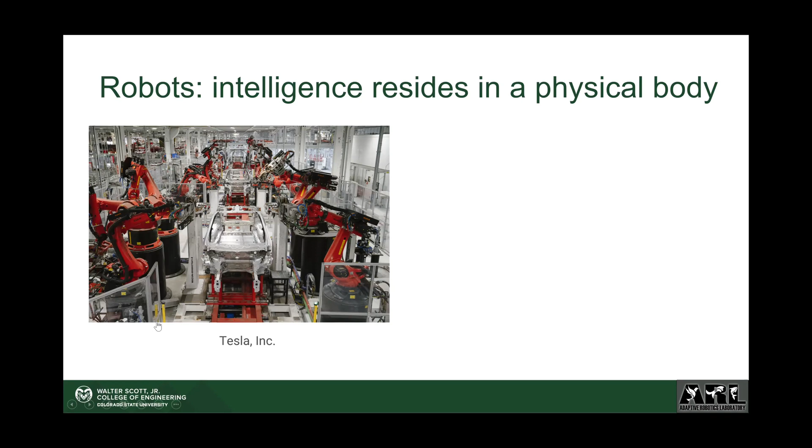That's a traditional robotic system. Recently, people are trying to develop robotic systems that can move from these structured factories to unstructured, dynamic, and varied environments. On the right, I have a figure from a company called Boston Dynamics — they develop four-legged robots and humanoid robots. All of those still need a body. The body should function very well if you want real intelligence. If you don't have the body, you cannot interact with the environment.

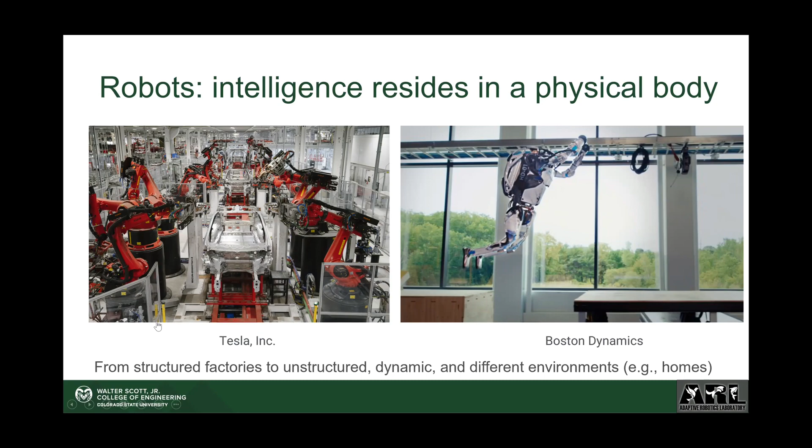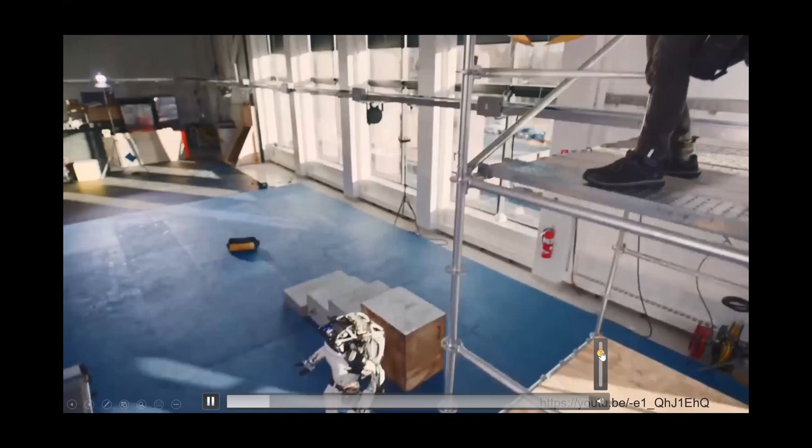I have a very short video from Boston Dynamics. Let me check the sound. Has anyone watched this before? It came out a few months ago. Anyway, it's a humanoid robot.

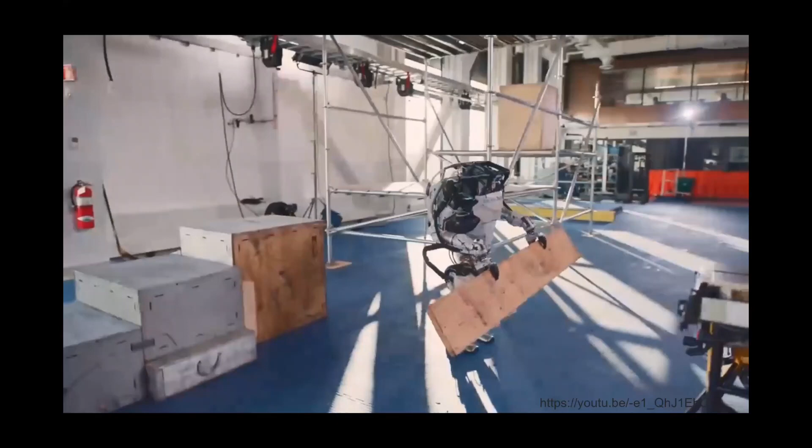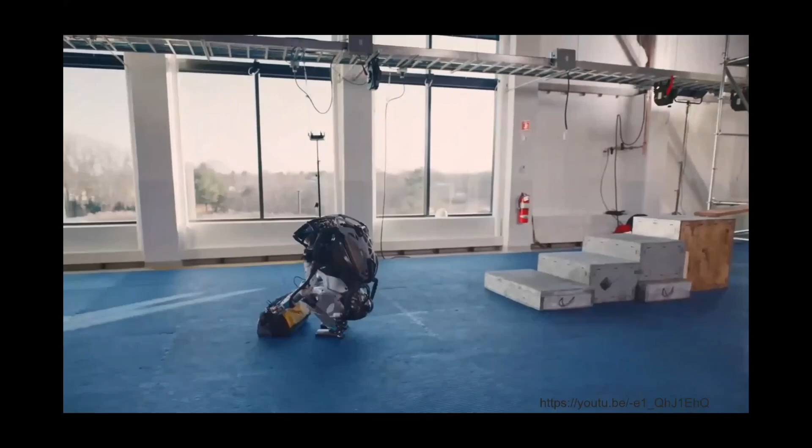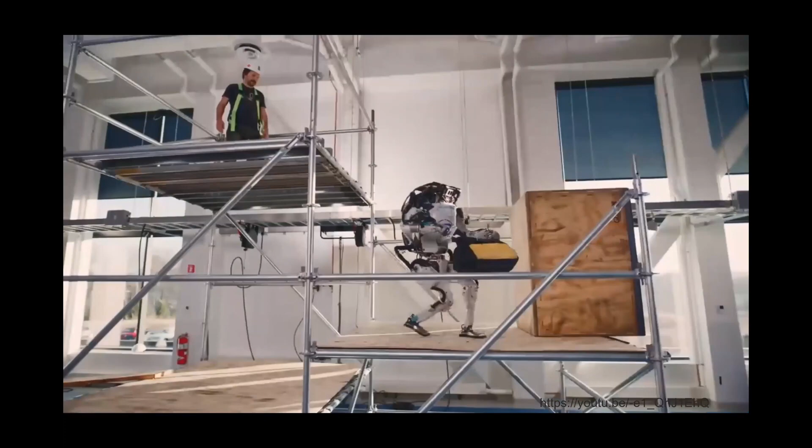It can pick this thing up and put it on. Then, because the person on top forgot his tool, the robot receives a command. The robot figures out how to get up, picks up the wood, picks up the toolbox and the tool, goes upstairs, throws it to the person, jumps off, and does a backflip.

This is a quite impressive result, because if you imagine all those joints — you have lots of joints, lots of arms — and you need to interact with the environment, you need to pick something up. So it's very difficult, but everything should be in the robot body.

So that leads to the major topic today: physical artificial intelligence. What is physical artificial intelligence as opposed to computational artificial intelligence?

Here I have a definition from one of the leading experts in this field, Metin Sitti from Max Planck. Basically, physical artificial intelligence is about how we can embed intelligence into the body of a robot or agent. So we have sensing, actuation, control, everything. How can we do that inside a body so that we can potentially reduce the computational requirement, or do something based on the body that can function by itself.

So here I have a few examples from biology. This animation shows a fly trap. Basically, this fly trap, as long as it senses something getting into it, can automatically close. Of course, this fly trap does not have a brain, right? It only has this body, no brain, to function. So how can it trap it? This is based on physical intelligence.

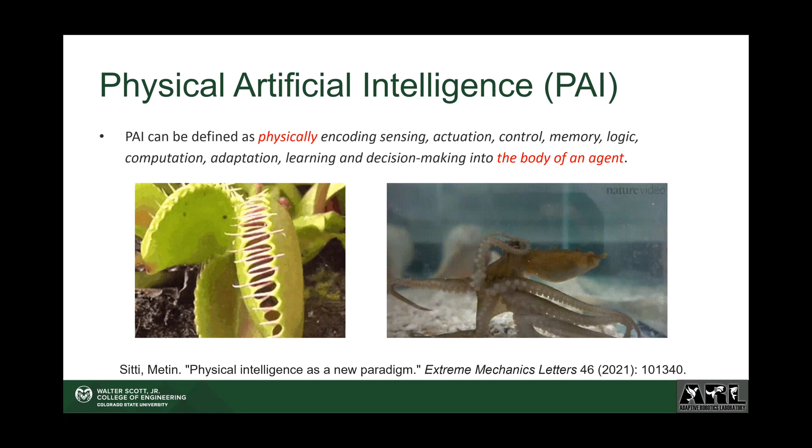So in my lab, we're trying to leverage this area of physical artificial intelligence to develop adaptive robotic systems. We are mainly focused on designing robotic systems that can better interact with and adapt to different environments.

We are specifically interested in robots that can change their morphologies. For example, here I have one example: think about applications like search and rescue, environmental monitoring, or surveillance. If there's an earthquake, normally there's no robot that can go into the area because there's too much rubble, or the environment is too difficult to navigate. So imagine if you have a robot that can move around, and if there's a small gap, it can squeeze or change its body size to make it smaller so it can go through the small gap.

And if there's a crack I want to go through, imagine the robot can fold its legs so it can crawl below this crack. And if I have a pipe, I can also locomote by changing the body morphology or the motion of the legs, so it can go through this pipe and also climb over holes. Eventually, you can use the legs as an arm, maybe to deliver medicine to a human trapped in the area. So those are things we try to accomplish.

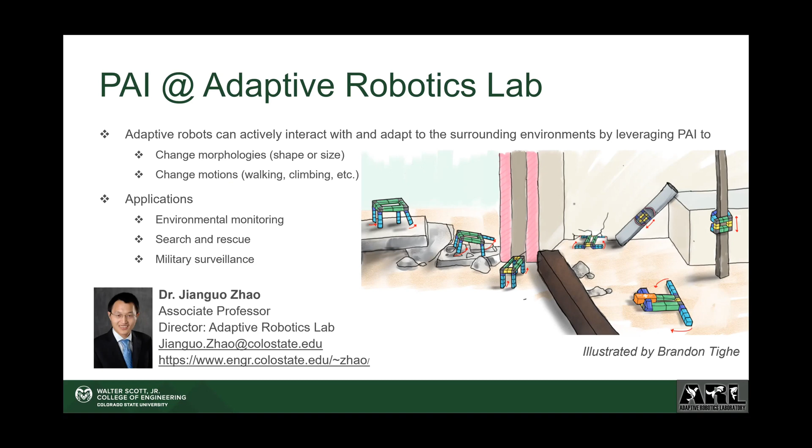So today, what I'm going to do is talk about 3 projects individually, trying to demonstrate how this physical artificial intelligence can complement computational artificial intelligence, and how we can potentially combine them together to enable the next generation of robotic systems.

The last project I'm going to talk about is how you can reconfigure the mechanical structure on the fly after you build a robot. Normally, if you want another function, you need to disassemble the robot and reassemble it to get another function. So if you have the same mechanical or physical structure, how can you reconfigure it on the fly so it can achieve different functions? That's the last project.

So the first project: perching for flying robots. I think this is a very good example of the trade-off between computational and physical artificial intelligence, and it's also a very interesting problem with a lot of practical applications.

Imagine all the flying robots nowadays, like quadcopters with 4 propellers—they can only stay in the air for less than half an hour, so it's very energy inefficient. But if they can perch onto some objects, like birds do, then they can save energy while still doing some function like monitoring.

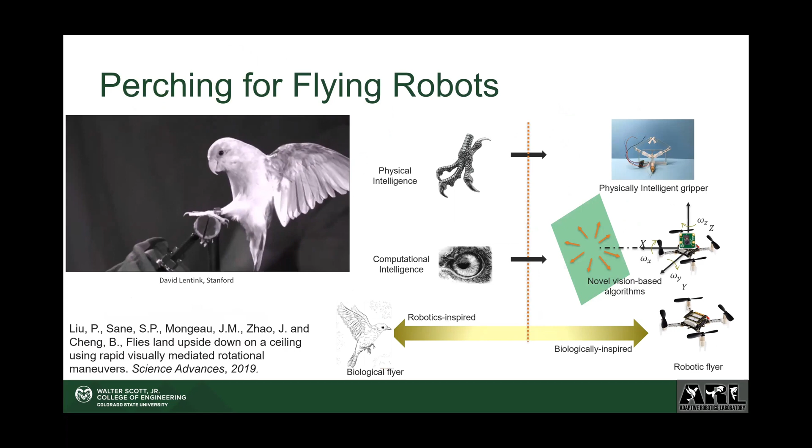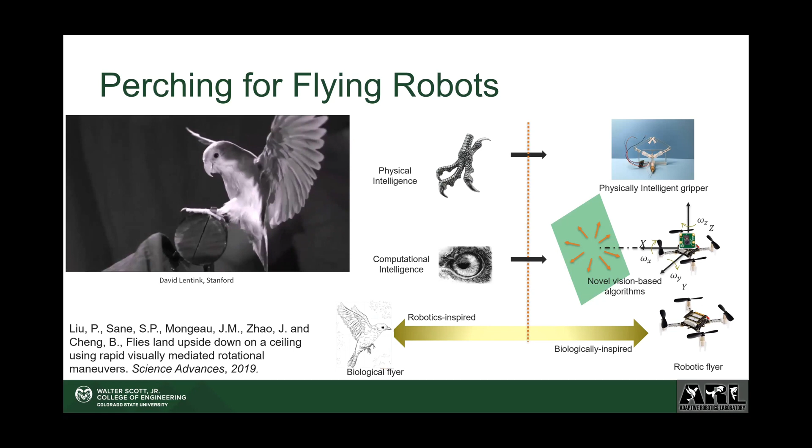The reason I think this is very interesting is that if you look at birds—on the left side I have a slow motion video of how a bird perches onto a tree branch. You can see it's a nice combination of physical and computational artificial intelligence, because you need to use your eyes to see how far away you are from the branch, then control your speed and adjust your orientation so you can eventually land. And when you land, your gripper needs to reliably damp out the landing impact and then land on the branch.

So it's a very nice combination of physical and computational intelligence. What we're trying to do is develop a new novel vision-based algorithm together with a physically intelligent gripper, so that combined, we can do this perching similar to how birds have done. I'm not going to talk about the computational intelligence here—we developed some algorithms—but the focus is how we can develop this physically intelligent gripper.

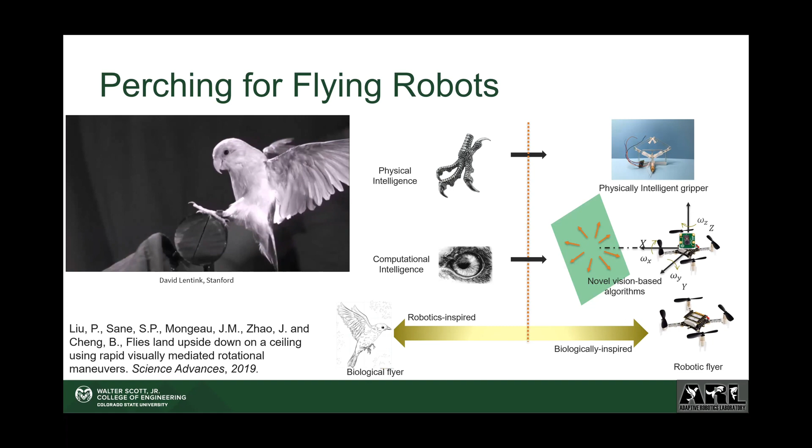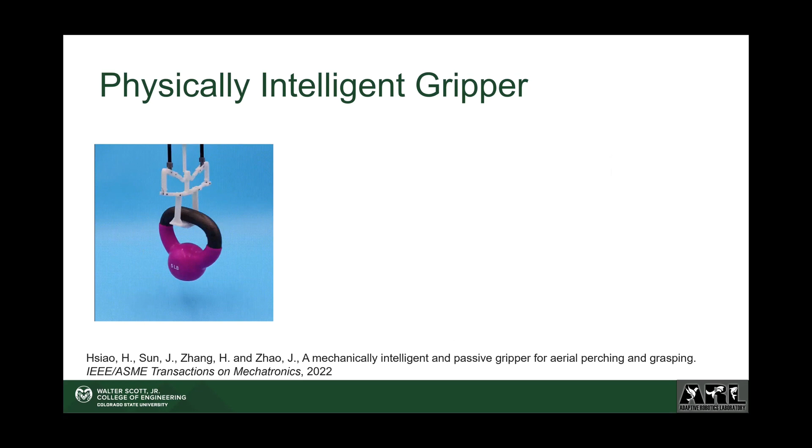We have developed several versions of this gripper. This is the newest version, which we published last year. I think it's very good because whenever you think about a gripper, you need some motor to actuate it so you can grasp. But this gripper does not have any motor or actuator—it relies purely on the impact force. When you contact the object, it closes, and after closing you can lift it up and it stays there, with the object staying inside. If you drop it off, it can automatically open. So there's no actuator, no control—it relies purely on mechanical structure to realize this grasping, holding, and releasing function.

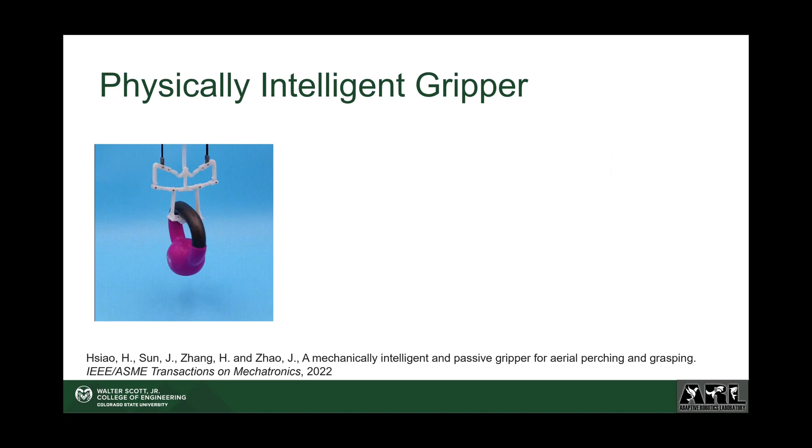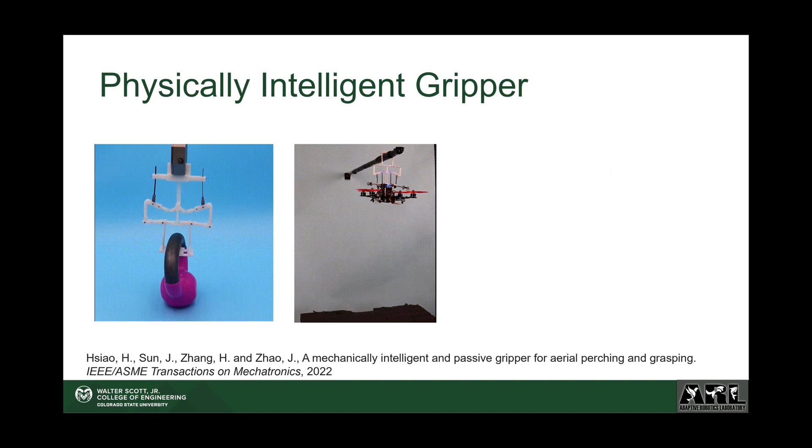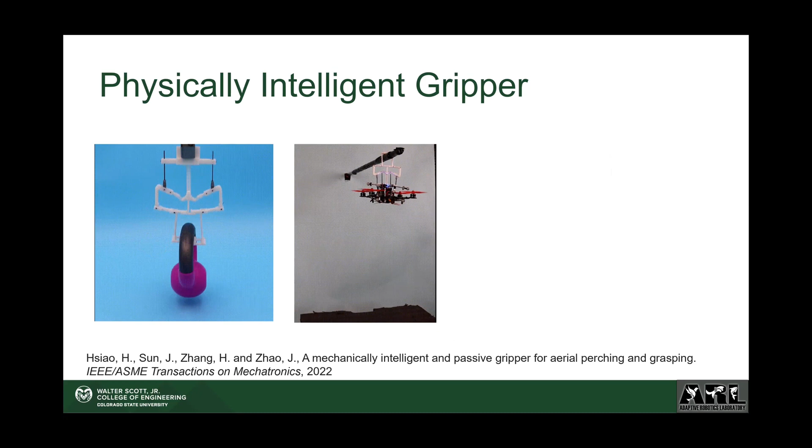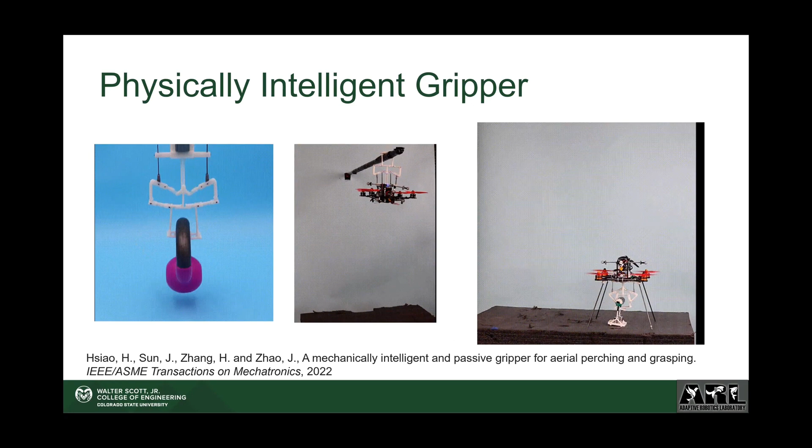This is ideal for perching purposes. We've done experiments with a quadcopter in our lab. One advantage of this gripper is that you don't need to precisely align the robot with the rod—as long as it's inside the gripper, the gripper will contact the rod and automatically close. Then you can turn off the propeller and motor, and it hangs there without consuming any additional energy. If you want to take off, you just actuate the propeller again to release. We can also use this gripper for aerial grasping—you can simply make sure the object is within the gripper, then it automatically grasps, and you can take it off and release it.

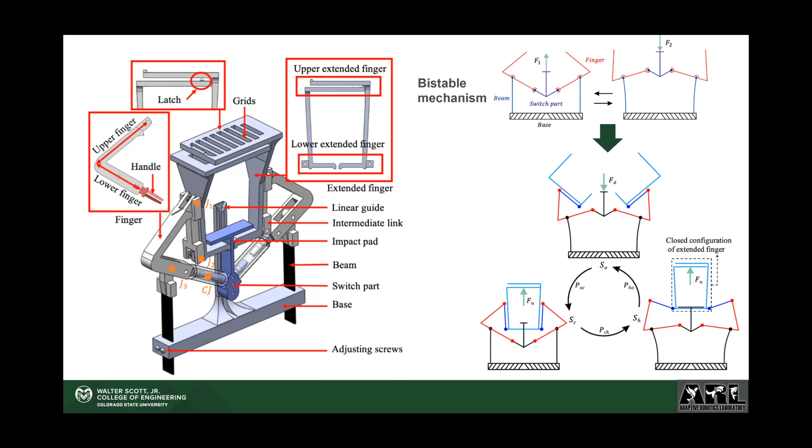Here's the working principle—I'm not going to get into detail, but basically it's a bistable mechanism, meaning it has two stable states: one open, one closed. We have a latch on top so that when it holds the object, it will always be able to stay closed. But if you remove that force, it can automatically open. I don't think the details are that important here—if you want to know more, talk to me later.

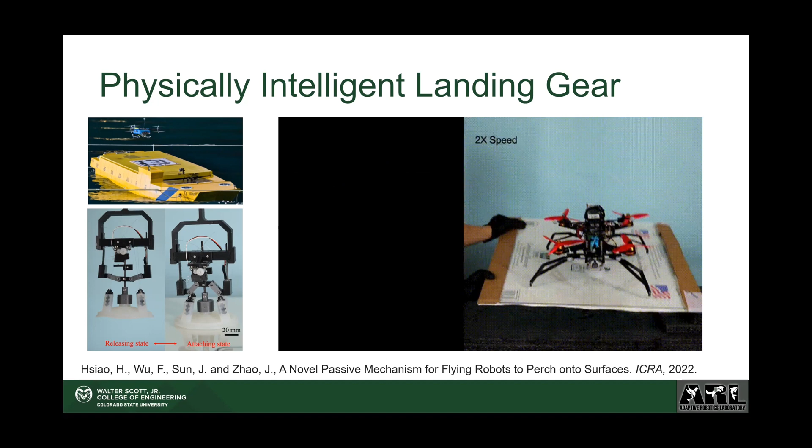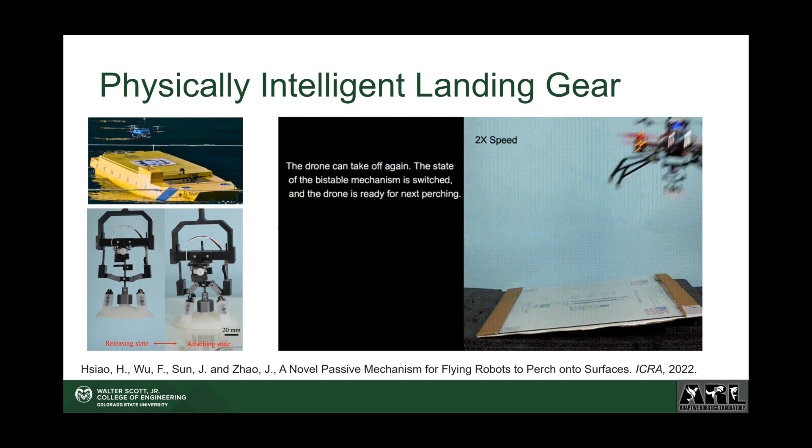We also developed another version of this physically intelligent design, which we call a landing gear, because the previous example was for perching on a tree branch. There are many examples where you want to land on a surface, like a boat—imagine how you'd land a flying robot on a boat, especially if it's on the sea, weaving around. How can you make sure it reliably lands? We developed this mechanism based on the bistable mechanism I just discussed, by attaching a customized suction cup, so that whenever it contacts a surface, it automatically attaches. We also have a locking mechanism to lock onto it so it can stay there.

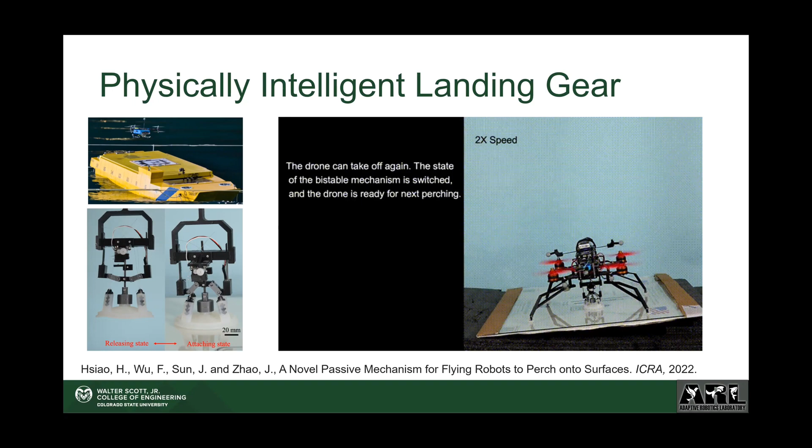But if you want to release it, you simply pull some cables using a very small amount of force, and you can pull it off. So that's this landing gear. This is the working principle.

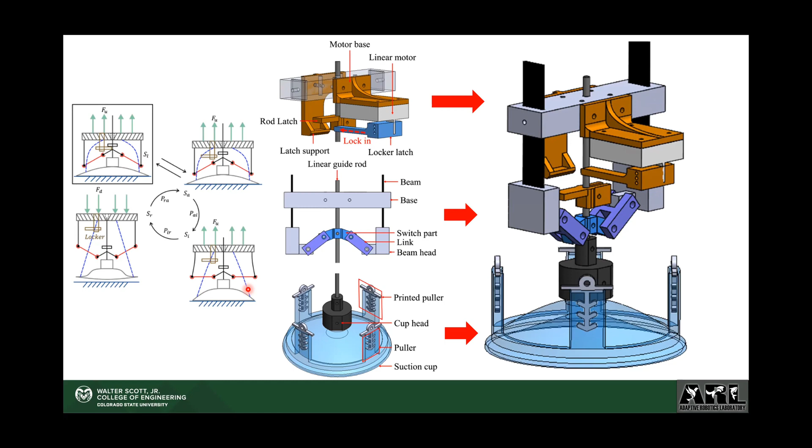Again, I'm not going to go into details, but with this perching example, I just want to illustrate this physically intelligent gripper can reduce the amount of computation requirement. You don't need to precisely control the robot because you can simply rely on mechanical structure to perch onto some other structures.

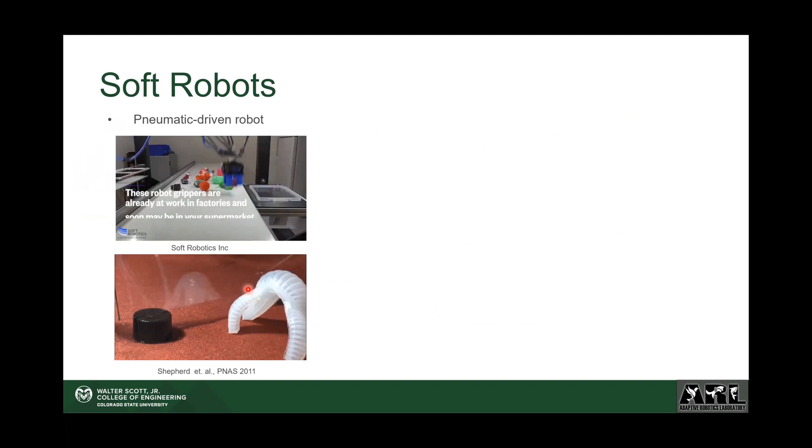So the second project is this, we call it soft robots driven by artificial muscle. For soft robots, it's opposed to traditional industrial robot, because if you think about traditional industrial robot, they have rigid links, they put in the factory, and normally you have a fence surrounding this robot, and only authorized people will be able to get into it because they get trained on this robot.

The reason is that those robots are rigid. If something goes wrong, they may hurt people, right? But this soft robot, they are made from rubber-like material. They are inherently safe, and we can build this robot to be able to interact with humans safely.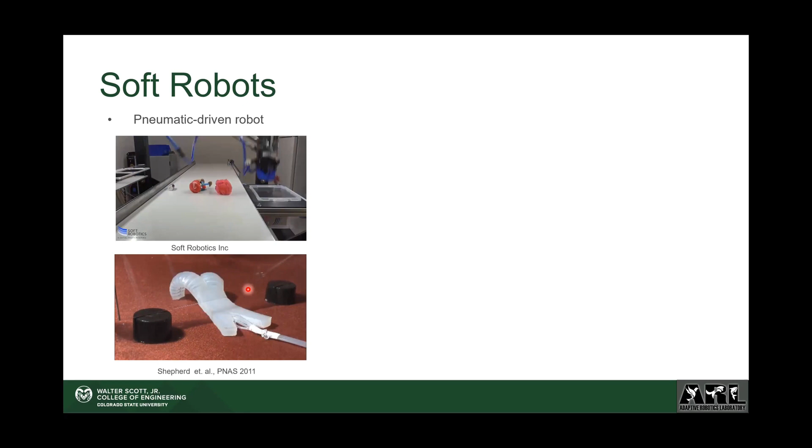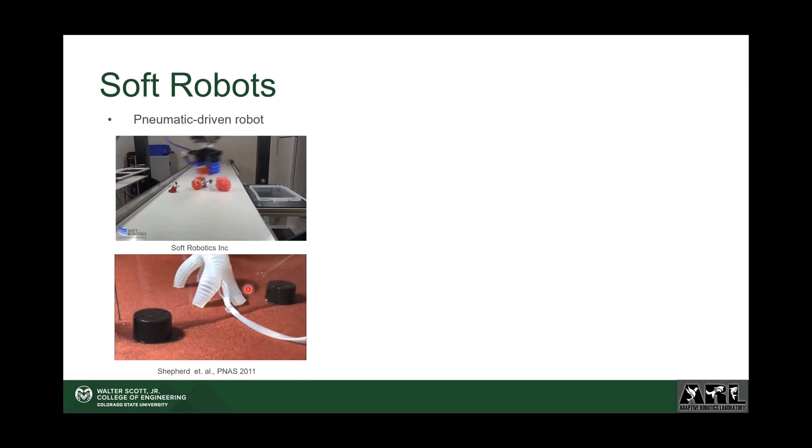Here I have two examples. One is this robotic gripper made of this kind of rubber-like material, so they can grasp some very fragile stuff like raw eggs, maybe vegetables, like tomatoes. Traditionally, if you use a rigid gripper to do that, that's very difficult. You need to sense the force, how much force I'm applying, to be able to precisely control it. But this soft robot, you can do this easily because you don't need to rely on a force sensor.

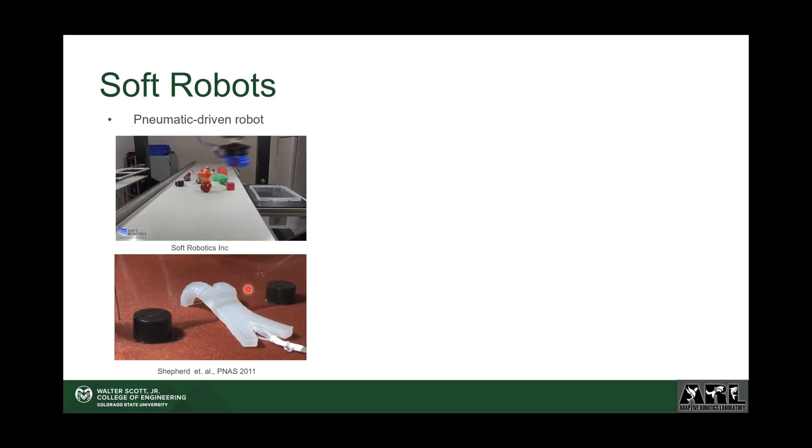And also, on the bottom, we have another work, a pioneering work, using the soft robot for locomotion. How can you change the morphology to deal with different environments? One critical aspect for this soft robot is that we cannot use the electrical motor anymore, like a rigid motor, to actuate these joints, because this soft material is like rubber. How can you actuate it? People have developed all kinds of methods.

On the left, two videos show pneumatics, using compressed air to actuate it. On the right, we have a bunch of examples like shape memory alloy, a motor-driven cable, or maybe a chemical approach, or maybe a dielectric actuator. So those are all what people call artificial muscle. Basically, it's like human muscle—you can generate this kind of motion, right?

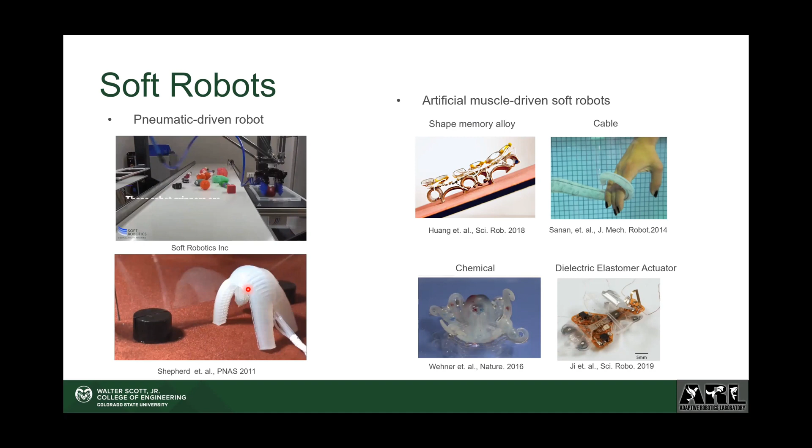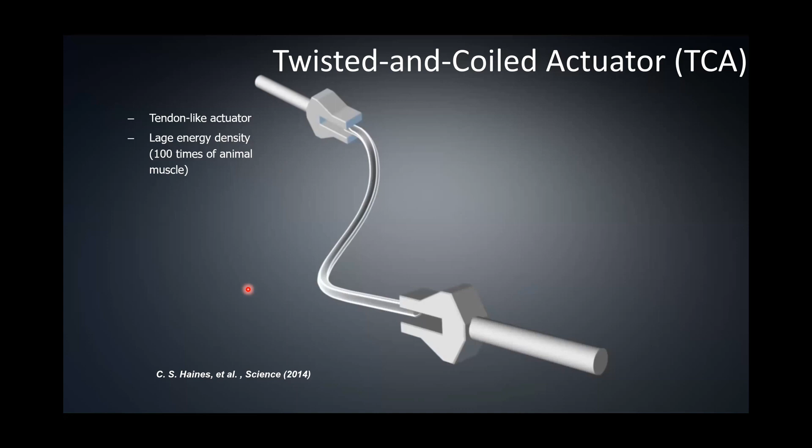But what we are doing is different. We are working on this, we call it a twisted and coiled actuator. This was published about 10 years ago in Science. This twisted and coiled actuator is very simple to fabricate. Basically, if you have any polymer fiber like a fishing line, or sewing thread, you can just twist it. You fix one end and twist the other end, twist it until you twist it a lot, and eventually you get this spring-like structure.

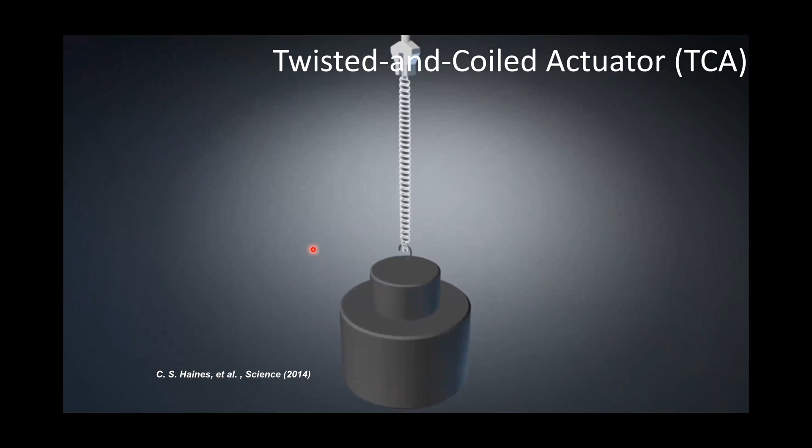And then if you hang a weight at the bottom and apply heat to it, you will generate linear actuation. So it's relatively straightforward, but it can be even stronger than human muscle because it can generate a very large force.

The problem with the twisted and coiled actuator is that they cannot have initial gaps. That means if you fabricate something like that, like a spring, there will be no gap between those coils, so that means you always need to hang a weight to generate motion. So what we try to do is overcome this difficulty—we try to create this twisted and coiled actuator with free strokes.

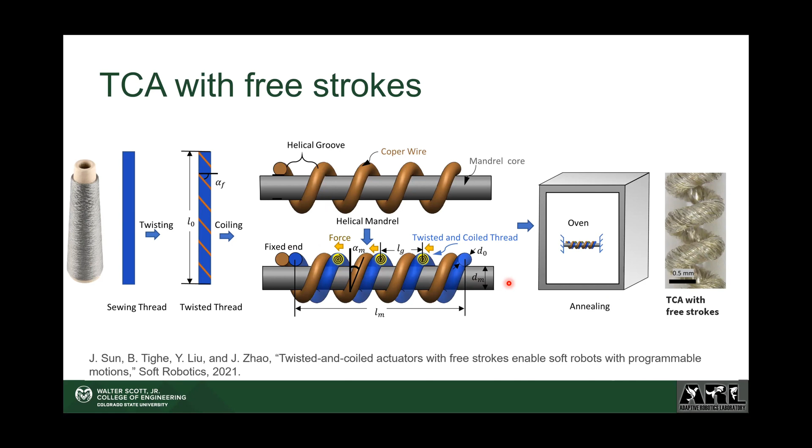We create a new fabrication method by using this copper wire as a helical shape. Then we can fabricate some artificial muscle with initial gaps. This is the fabrication procedure—I'm not going to detail it, but basically you just twist it and then put it on this mandrel, and eventually put it in the oven at a certain temperature for a certain amount of time. Eventually, this muscle will become this shape.

Then we did some quantification. Basically, we try to fabricate different muscles with different parameters. And this video shows, okay, 0.02—the muscle is very lightweight, 0.02 gram, but it can lift 20 grams, which is 1,000 times its own weight, for more than 55% of displacement.

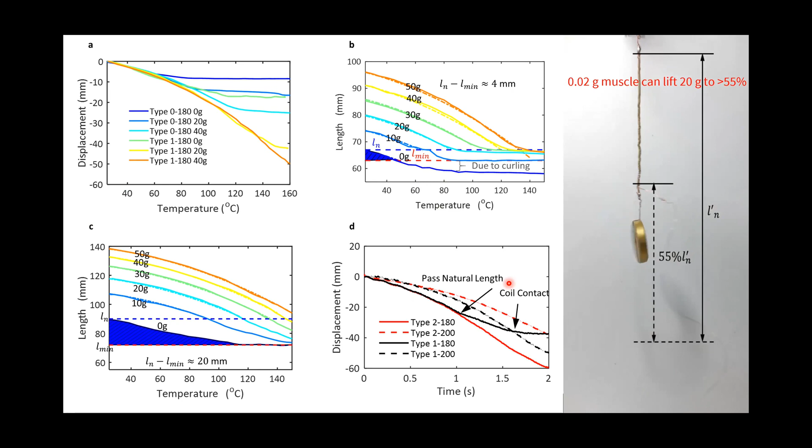We can use this muscle to do a lot of things, like building a soft robot. How can you actuate it? We can have 3 muscles placed in parallel into a rubber-like material.

If you control them individually, you can generate a bending motion. This is very small, like the size of a finger, and you can do this bending motion in a three-dimensional space.

We can also wrap it in a helical shape around a soft body, so you can generate this twisting motion. This is a top view - if you see it from the top, you have this twisting motion.

You can also create a gripper, a very simple gripper. Initially it's closed like this. Then if you actuate the muscle, you can open it and grab something.

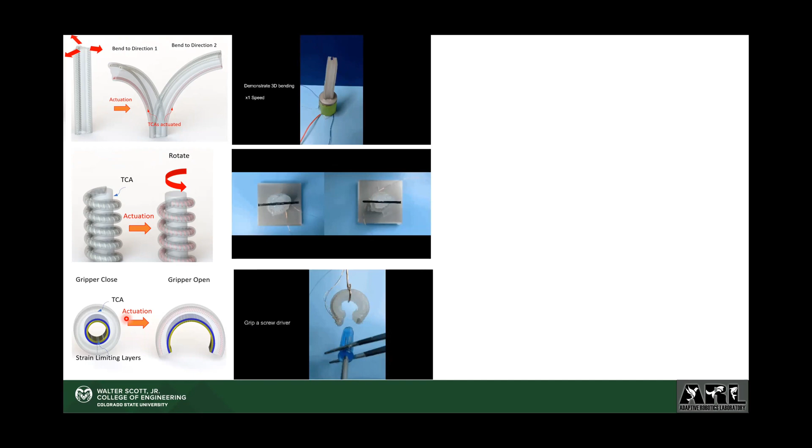Finally, we also try to combine them together. You just connect these 3 components into a single part - this is a 3D bending part, this is a twisting part, this is a gripper part. If you add them together, you can build a very small soft robotic arm.

Again, it's like your finger, the size of a finger. You can do this manipulation, pick up something, and do pick and place, basically.

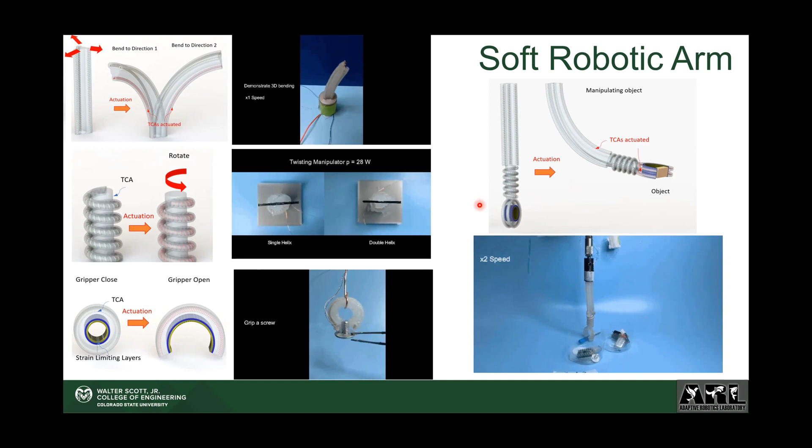Another good thing about this, as I mentioned before with physical artificial intelligence, is that you can integrate sensing with the physical body. A good thing about this artificial muscle is that it has a self-sensing capability. That means if you try to actuate it, the electrical resistance will change, and we try to leverage that electrical resistance to do feedback control.

How can I control displacement? I want to move 10 millimeters up. I can simply regulate or control the electrical resistance to a specific value.

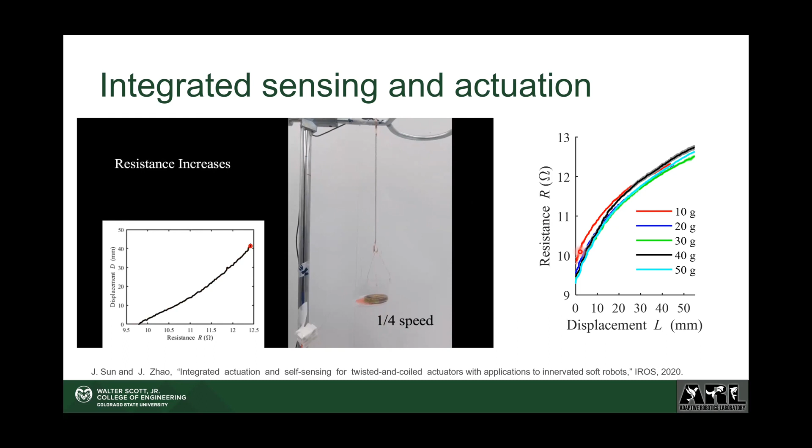So here we try to evaluate by hanging different weights at the bottom and then see how resistance changes as we actuate it. You can see that it's pretty consistent, meaning we can use these curves to do the control.

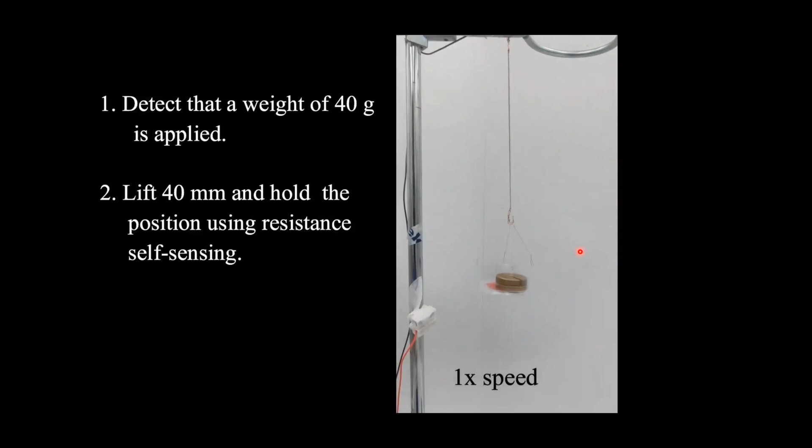Here is a simple demonstration that I can use this muscle to detect how much weight is applied, and then I can lift the weight to a particular distance. I can also detect another 20 grams, all based on the self-sensing ability of this actuation muscle.

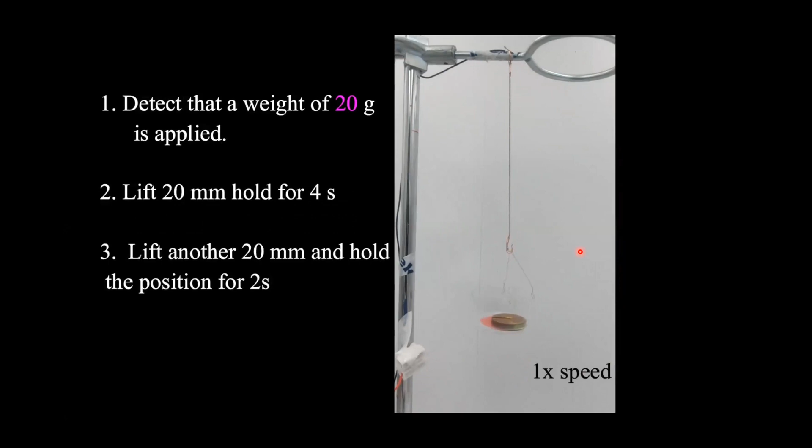You can imagine this is a very simple demonstration - I can use this as a sensor. If a human touches this, I can detect it, and then control it to move or bend to a specific angle.

You can imagine more complications can be done. If you build a gripper with this, I can use touch basically like a touch sensor - I can touch the desk, the chair, or other objects, and if I feel there's some object there, I can grab it. This is very good for those kinds of applications.

The self-sensing capability.

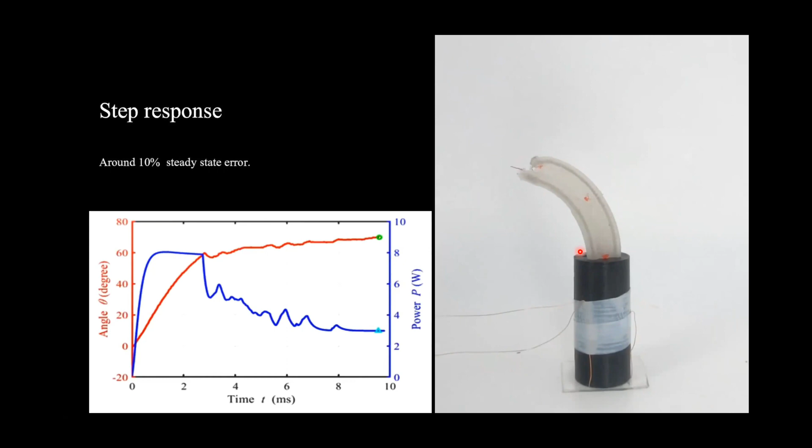I'm not going to talk about this, but there is some math behind it, because if you want to model this kind of soft robot - since they're stretchable and can bend in any direction, unlike a rigid robot which is relatively easy to model - you need to use some solid mechanics to model this kind of soft robot: how to model the muscle, how to model the soft body, and how to model the coupling between them. That's kind of difficult.

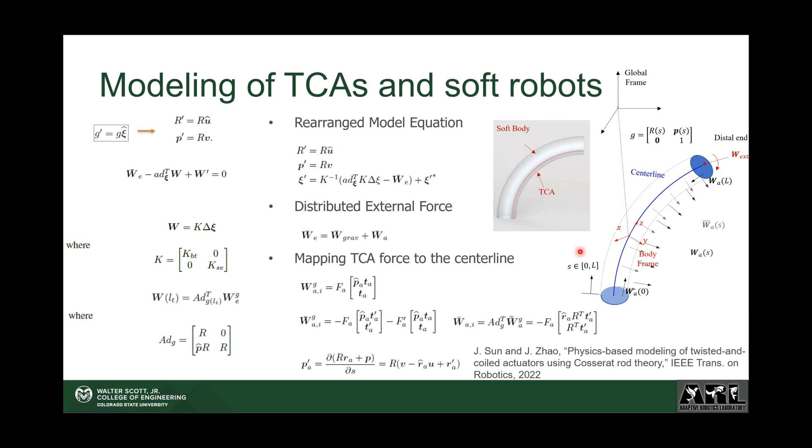So here we have developed some model to do that, but I'm not going to talk about the details for this.

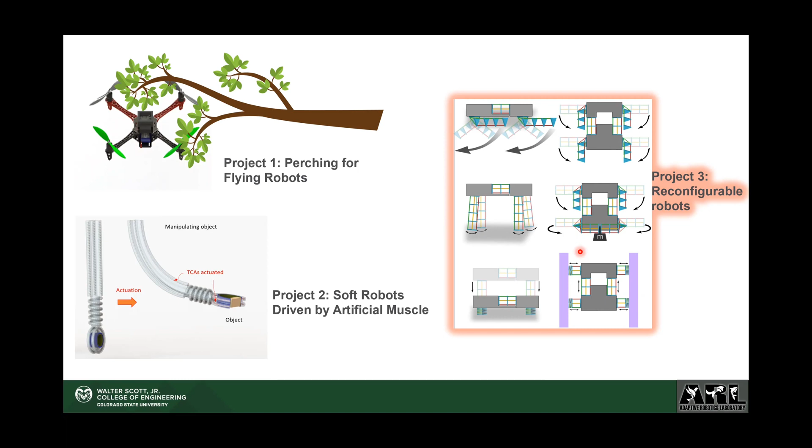All right, so here's a transformer. So the last project is Reconfigurable Robot. Again, as I mentioned before, we are interested in how, if you have a robot, the mechanical or physical structure is fixed, how can it reconfigure itself to different functions? So this is what we try to do here.

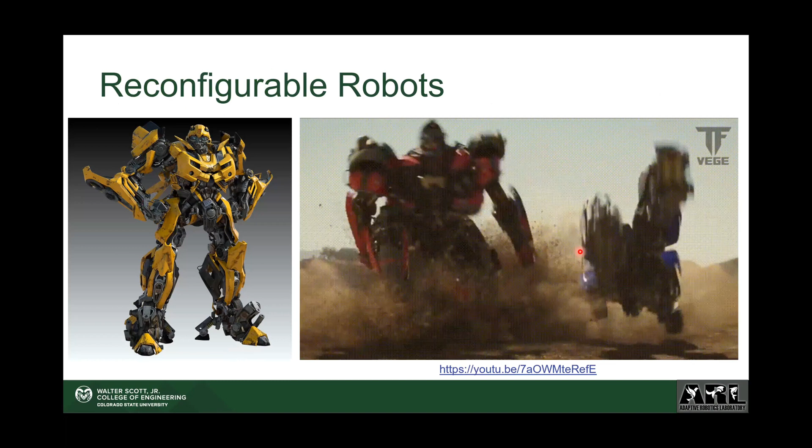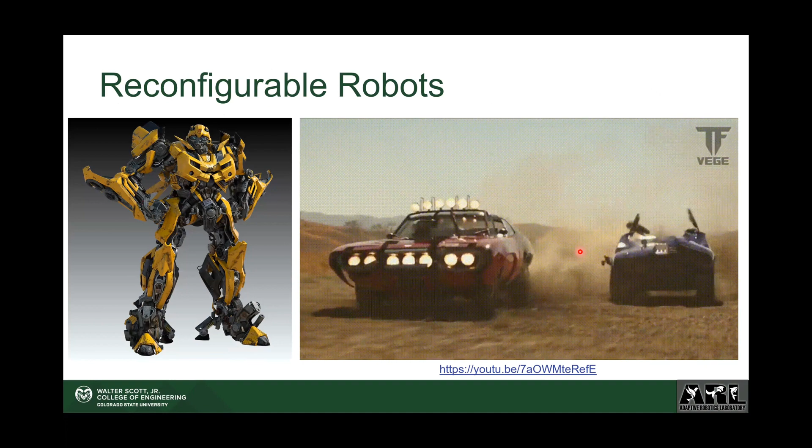So what I'm going to do is talk about some work we're trying to do in this area. Essentially, we are trying to see how can we leverage what we call variable stiffness joints to reconfigure a robot's mechanical structure.

The material we're using is very simple - it's like normal 3D printing material, like thermoplastic. For thermoplastic, there are two temperatures. One is called the glass transition temperature. If you heat it up above this glass transition temperature, the Young's modulus, which is basically how stiff the material is, will decrease. The other temperature is called the melting temperature, TM, and after this temperature the material will melt because it's 3D printing - that's the working principle of a 3D printer, right? You can melt material to be able to form the part. So two temperatures, TM and TG.

So we can use this to build this kind of compliant joint, or variable stiffness joint. Initially, if you heat it up, it becomes soft. If you cool it down, it becomes rigid, and you can hold that shape. If I bend it to a particular angle, you can hold that shape. So that's the advantage of this.

When you try to apply this to a working robot, we have a mechanical mechanism which is some kind of linkage - some kind of linkage with joints, and if you combine them together you will be able to generate different motion. This is the leg, this is the foot. Normally, when you do walking, you would expect some kind of loop trajectory, like this.

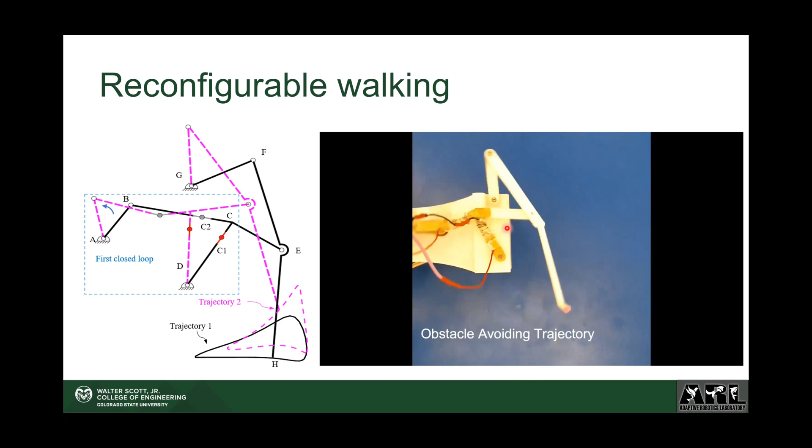So we can actually achieve 3 different trajectories. Well, another one is totally different, but that one cannot be used for walking - we'll just show the 2 trajectories here. Basically, you have a variable stiffness joint here and here, and we can make it soft or rigid. So now it's soft - you can see that this will rotate a bit during the motion. Then the next time we can make this soft, and eventually you can change the trajectory. Basically, you can change the length of the link - the link is initially fixed, but we can change the length through this reconfiguration strategy.

What's the time frame for that change, how rapidly? That's relatively long because you are trying to heat it up. We can speed up the process by using larger power, higher voltage. For now, probably, I don't remember exactly, probably like 20 or 30 seconds. Then eventually you can achieve different trajectories.

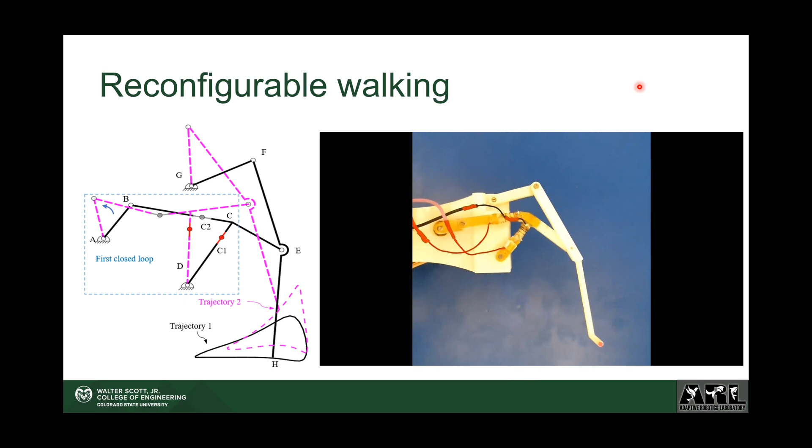So I have a video for walking - we built a walking robot with 4 of these legs, and it can walk around. For time, I didn't put it here. I think this next part is more interesting because we can do more interesting stuff.

Based on this variable stiffness joint, we build this kind of reconfigurable module. This is relatively straightforward - you have 3 vertical beams and 3 diagonal beams, and on the diagonal beams we have this variable stiffness joint, so we can control the stiffness, making it soft or rigid. If all 3 are soft, you can do this collapsing motion, or fully collapse when you drag a cable in the middle. And if 2 joints are soft, the middle ones, then you can do this bending 90-degree motion.

Bending. Eventually, if one joint is soft, then you can do what we call slant motion. It's similar to bending, but it bends towards a different direction.

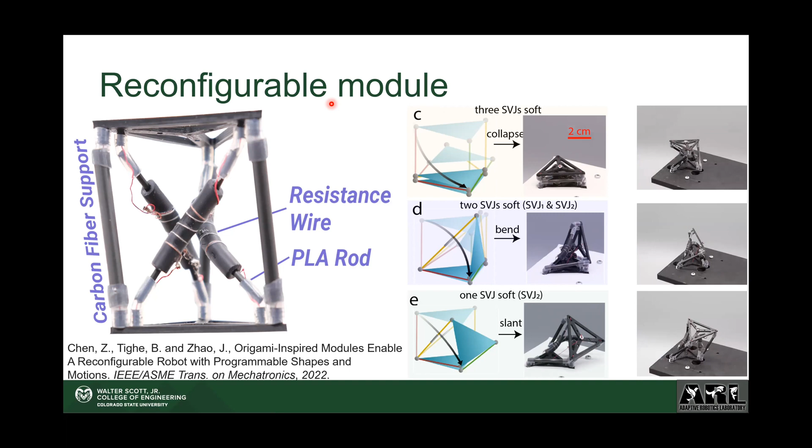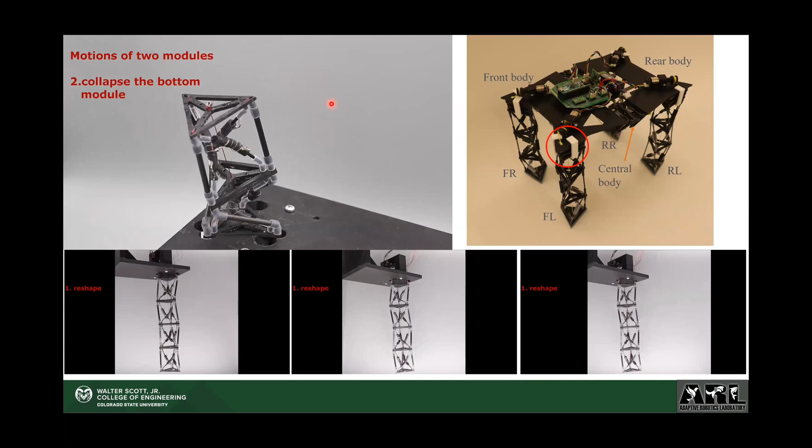The one module isn't that interesting, but if we have more modules, say 2 modules, I can control the stiffness of each joint individually and generate different motions and shapes. Here's a demonstration of all the different motions we can generate.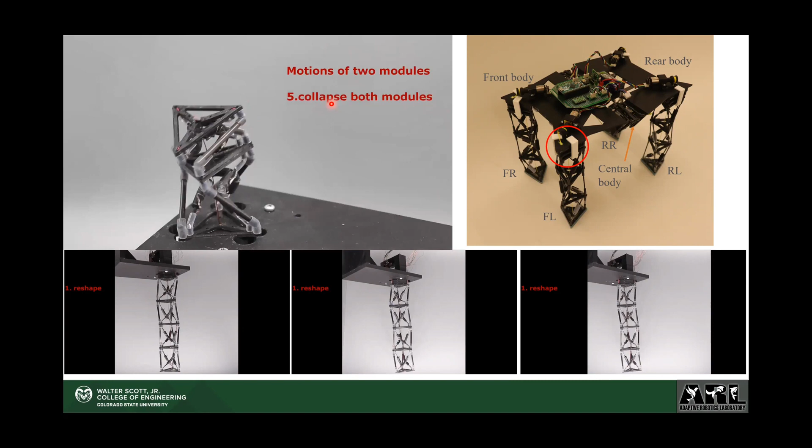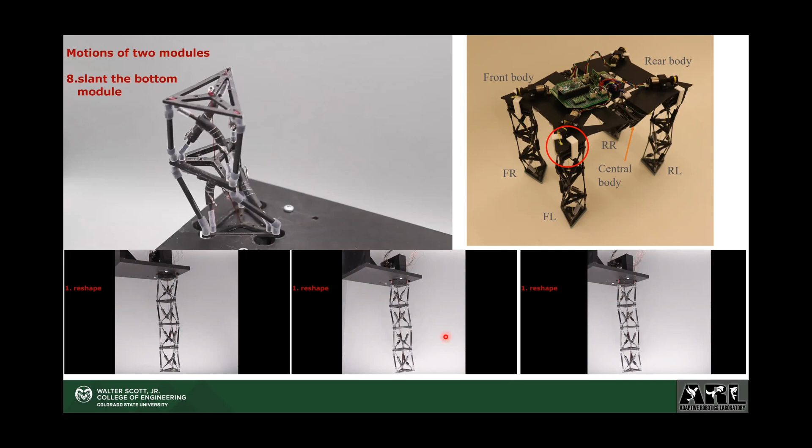We try to use this method to build a robot that has 4 legs. Each leg will have 4 of these modules. By changing the configuration of the leg, on the bottom I have the motion for each different kind of locomotion. Essentially, you can do this walking.

I try to collapse one module and then do this motion, and I can walk around. Then the second video is that if I try to bend my legs 90 degrees, let me see, yeah, 90 degrees.

I can fix that shape, and then do something like this, a crawling motion, right? And the last one is this: we can do this climbing motion or inching motion inside some kind of pipe.

Yeah, so it can still do this first, and then it will collapse the last module. This one will bend, but this one will collapse.

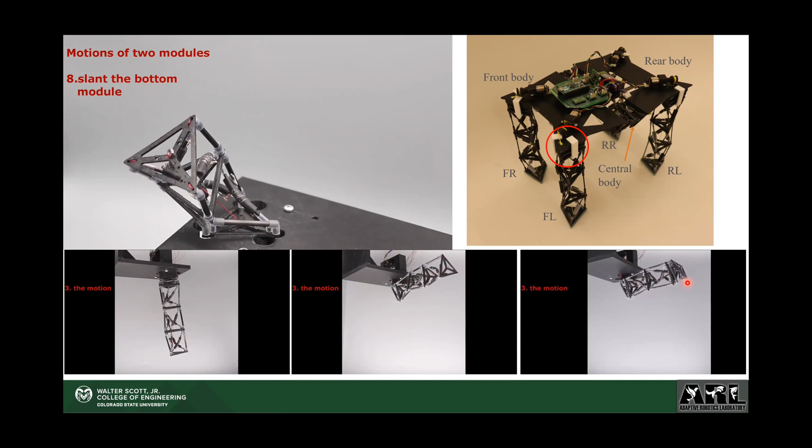So that's just one leg, and if we combine them together, we can do different things with the same mechanical physical body. If all 4 legs are standing on the ground, we can do this walking, shown on the top left.

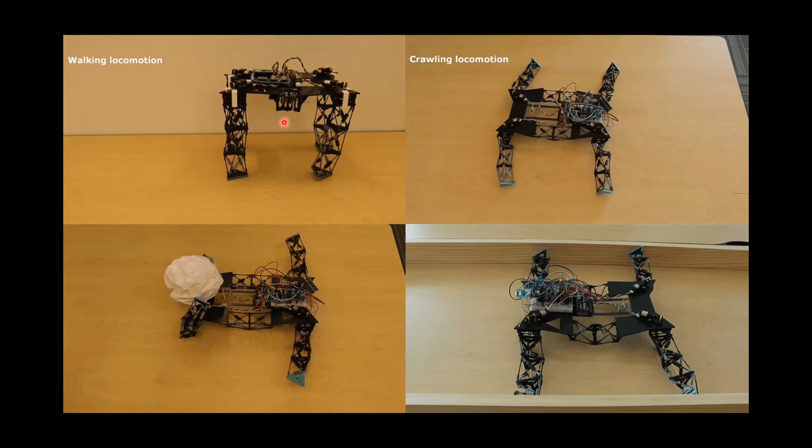Also, if I try to bend all 4 legs around 90 degrees, then they can crawl on the ground. And I can also use 2 of the 4 legs to grasp some object, while the other 2 legs move forward.

The last video simply shows that you can move inside some kind of pipe, or whatever you want to think of it as, using inchworm-like motion.

Not as impressive as a transformer, but we are making progress. All right.

Those would make wonderful cat toys.

Okay, all right. I don't try to go very deep because I think everybody has a different background, so I just talk through the videos. Hopefully it's not too boring. I just covered the 3 projects.

The point I want to make is that physical artificial intelligence, how to better design a robot body, is equally important as computational artificial intelligence. Because if you only have computational artificial intelligence, you will not have very good robots. A robot needs to have a good body.

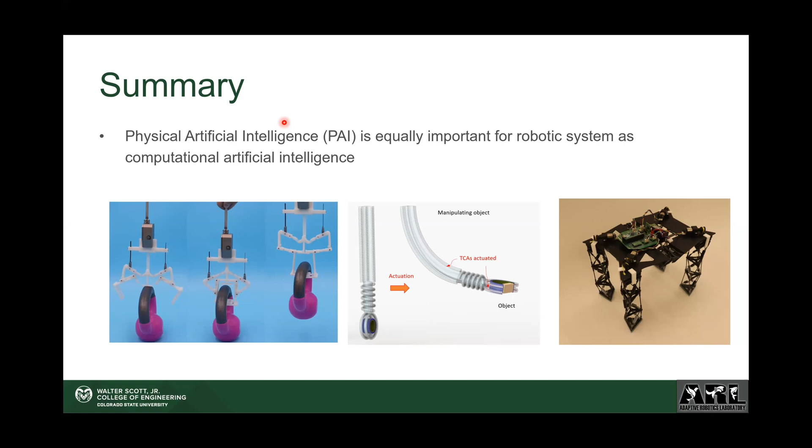So that's the very brief summary. For future directions, I think it's very exciting because with computational artificial intelligence we have enormous computation power. So I envision we can have 2 directions.

One is that we can co-design the robot body and behavior. Because lots of people have developed simulation tools, you can have very realistic simulation. So we can build the robot in simulation, run it, and tell how good this robot is. If it's not good, I can iteratively find the optimal design for a given task.

Here I have some different morphology for a robot. This is from a Nature Communications paper. People have used deep learning to try to learn different morphology for a specific task.

Going even further, I call it co-adapt. If I've already built a robot, how can the robot, when placed in a different new environment, use its sensors to figure out what should be its optimal morphology in this environment, and then what is its optimal behavior, like motion, what is its gait?

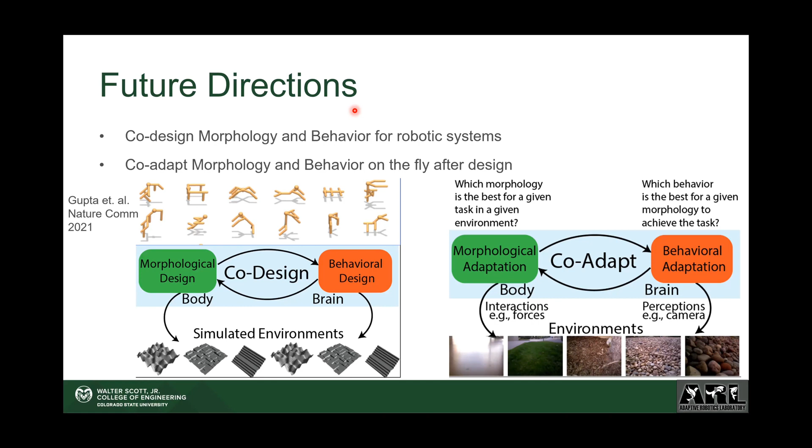So how can you co-adapt the morphology and behavior on the fly, after you build a robot, in real environments, all different environments? Imagine a robot that can move on grass, maybe on pebbles. On those surfaces the robot may need different morphology and different motion. How can you co-adapt the morphology and behavior? That's the future direction.